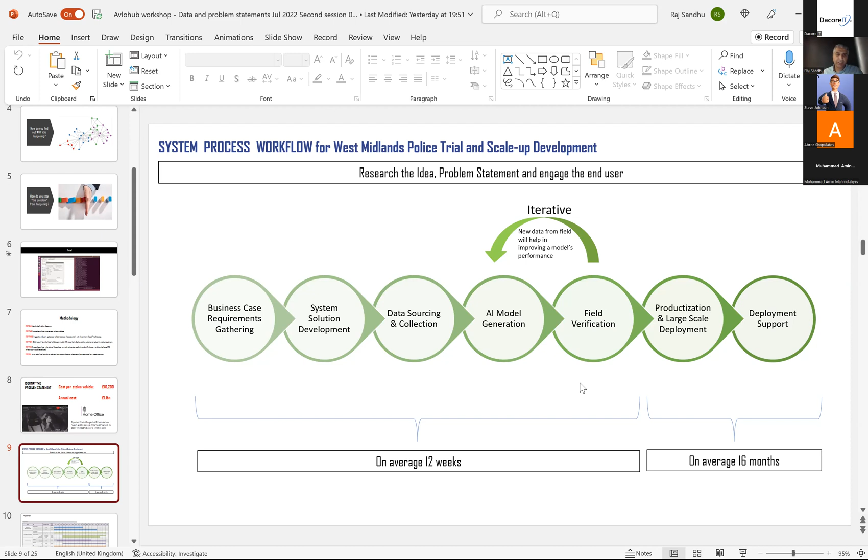And then we also touched on a bit about the planning - how do you actually put this together? And then you've got the separate job titles here in terms of the sort of tasks that take place. Okay, any questions from last time or any thoughts?

Again, interrupt me anytime. You don't necessarily have to listen to me. You can interrupt anytime. Any questions or thoughts on this?

Okay, so the important aspect which I touched on briefly was the domain expert. For each of the projects that we have, we always use a domain expert.

That is somebody who's got experience at a high level within a company. They may have 30-something years, 20 years minimum is best. They understand AI and data science, meaning they understand what it can do, though it doesn't mean they can program. They can also understand an academic paper, not fully, but they get what the academic is trying to do. And they could be a project manager.

They must provide input into the features, and when it comes to the commercial side, it's always easier for them to sell to the company.

So for our police project, this is our domain expert. As you can see here, he's been a chief superintendent. He's managed 300 staff, he ran Hertfordshire as a police force, and he looked after the murder team. So you can understand he understands policing very well.

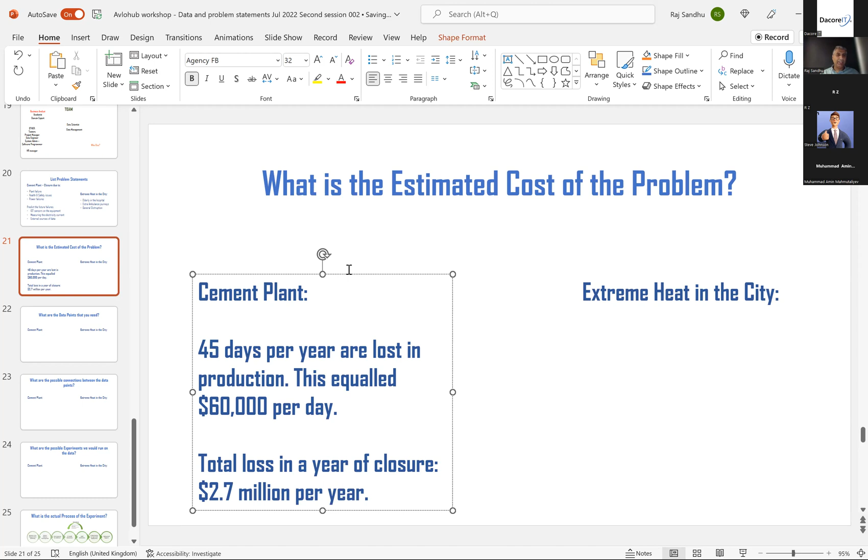So based on this, would you say that this is a problem statement worth looking into? Yeah, this is to everyone — it is worth it, right? Yeah, for sure, because the company is losing much more money.

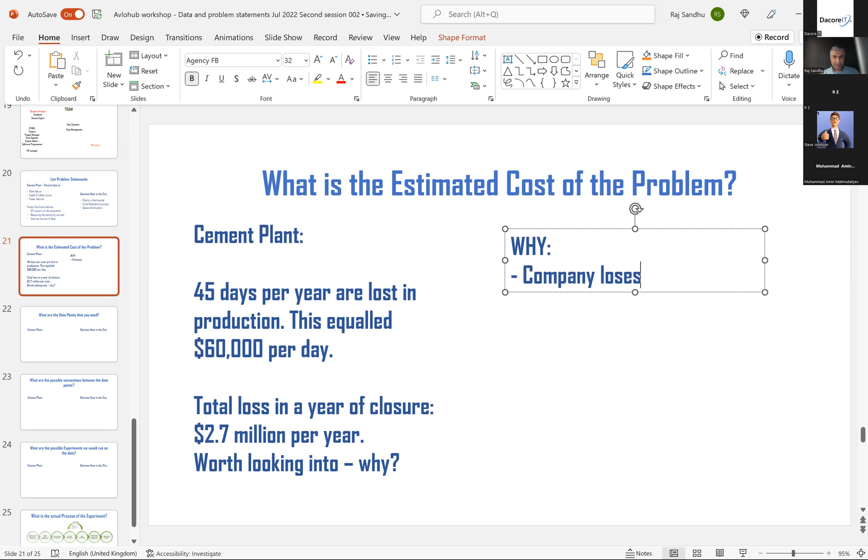So the company is losing 2.7 million, right? But think about it from your own perspective — just imagine you're going to the boss of the company. Abroad as well, this 2.7 million represents 20% of the annual income.

Right, do you think this is the only company that has this type of problem? Certainly not. Is this the only company that has this type of problem? Alex, Maruf, anyone? No, there would be a lot, right?

So many other companies will have the same issue, or similar issues, right? So in theory, if you've got 5 companies with the same problem, it becomes a $10 million plus challenge, right?

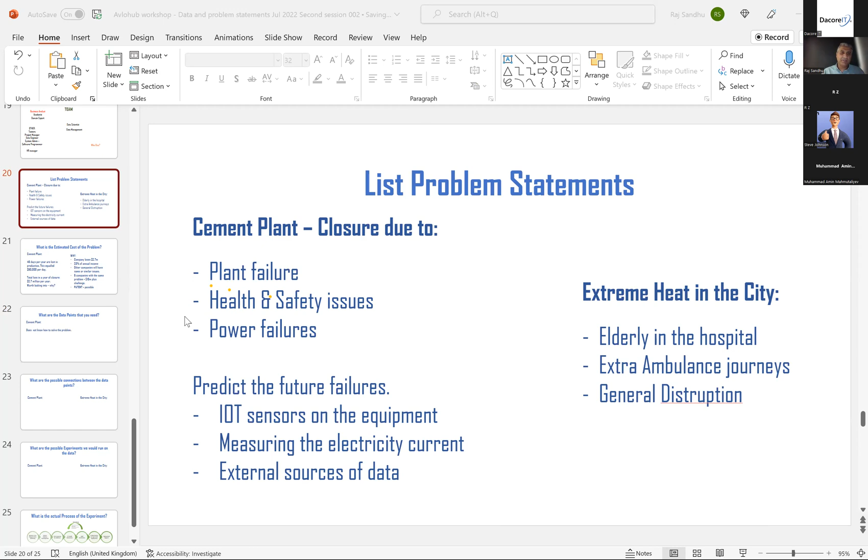Based on what we said earlier before. Well, yes, Dilshad — statistical data of what? What is statistical data? What do you mean? Tell me. Selling cement. Okay, cement sales, volume of production.

Right, what else? Extra cements. Okay, what else?

You know, Dilshad, you have to explain why we need this data. I think company expenses, company expenses. Yeah. Okay, what else? What else?

Right, so your materials, they call it, to produce, manufacture cement. All right, what else?

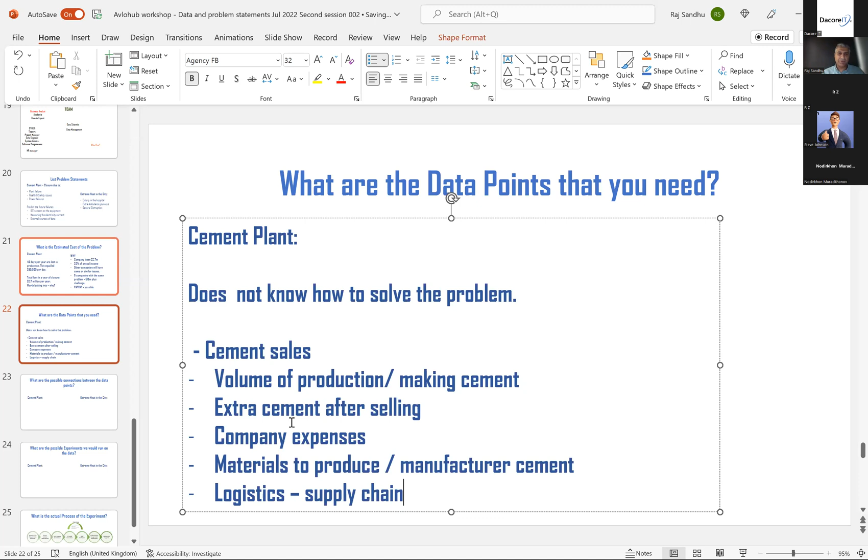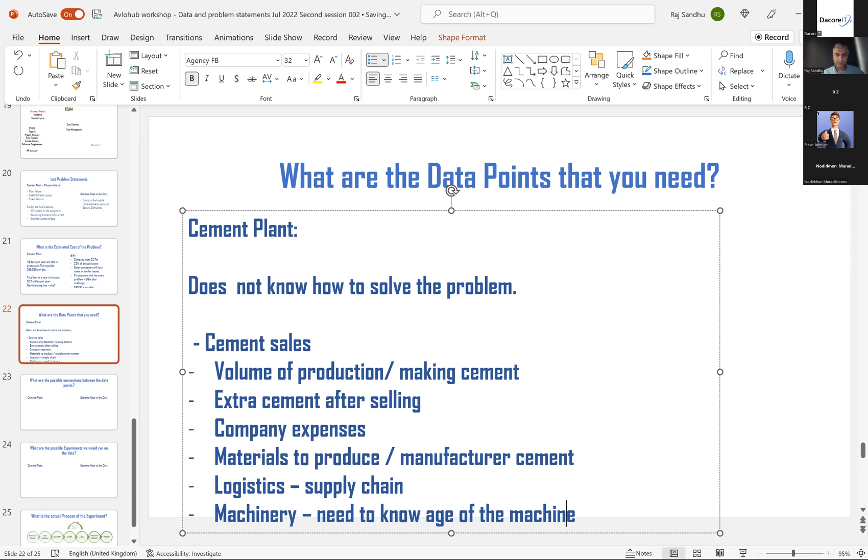Need to know age of machine, when it is serviced. Need to know age of the machine, when it is serviced. Cost of servicing.

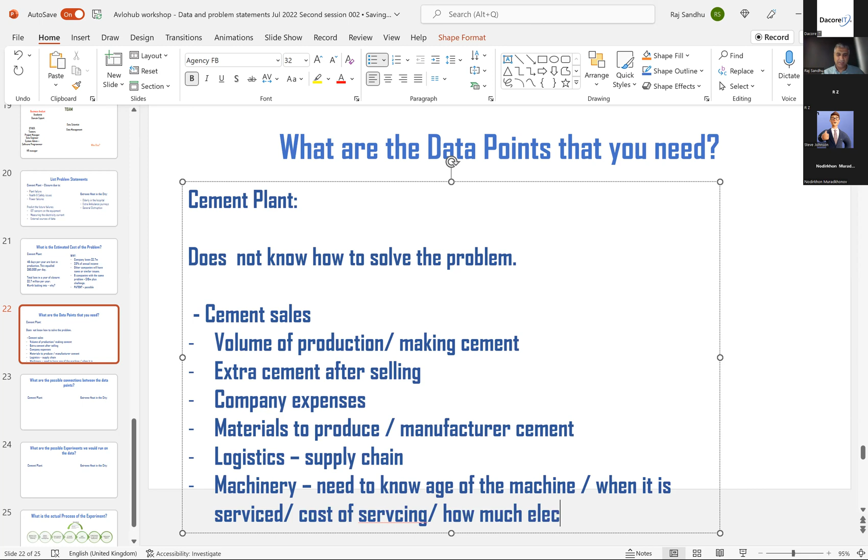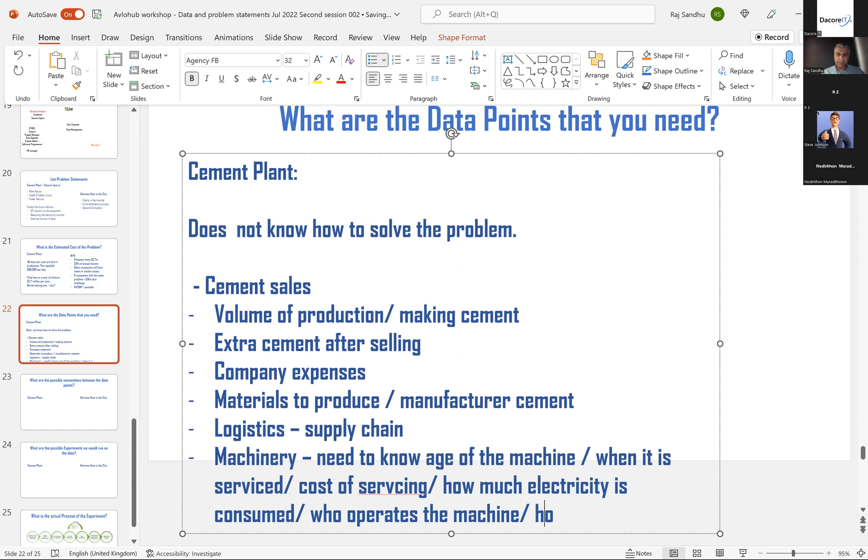Right? How much electricity is consumed? Right? Who operates the machine? Right? How long the machine is running?

The whole point of it, because of the request. So what? You mean the order? Are you talking about the order? Yes, if a company needs to make 1 million tons of cement, yeah.

But then how does that data help with the detection of when the machine will fail, that they will have a closure? You're not thinking, you have to think of the relevant data set that you need that will tell you why the machine is failing, why the production machine is failing. How will the orders give you that information? What are you looking for in that data?

Or why do you think? Again, there's no right or wrong answer, right? So the whole idea of the session today is to try and listen, try to understand what we're doing.

From what I can see, this is, I mean obviously I know a bit more, so that's why I'm saying it. But the machinery side is your starting point. If you have these data points, then you know everything about the machine, and you know about the staff, how much electricity is being consumed. So if it starts consuming more electricity, it means that there'll be more problems in the machinery. You understand? So that's what we need to try and do.

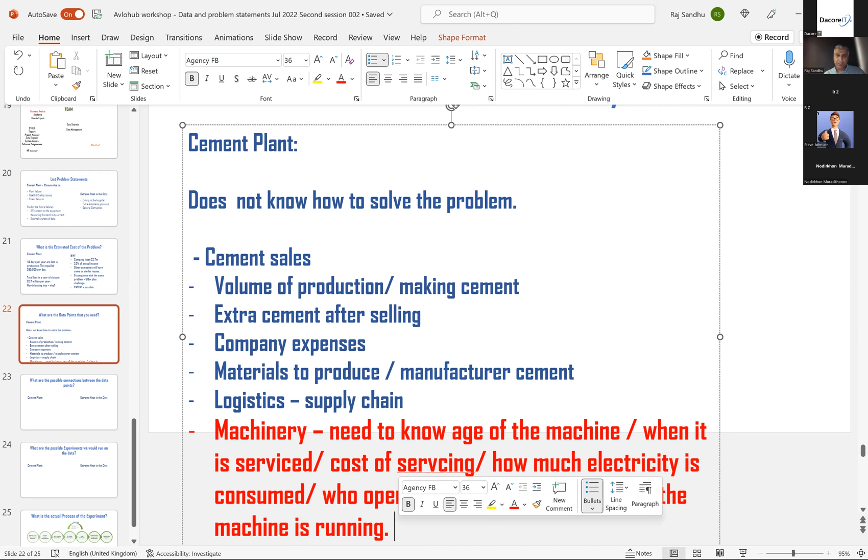The other new data we can get is to put IoT sensors on the machine itself. This will measure the vibration.

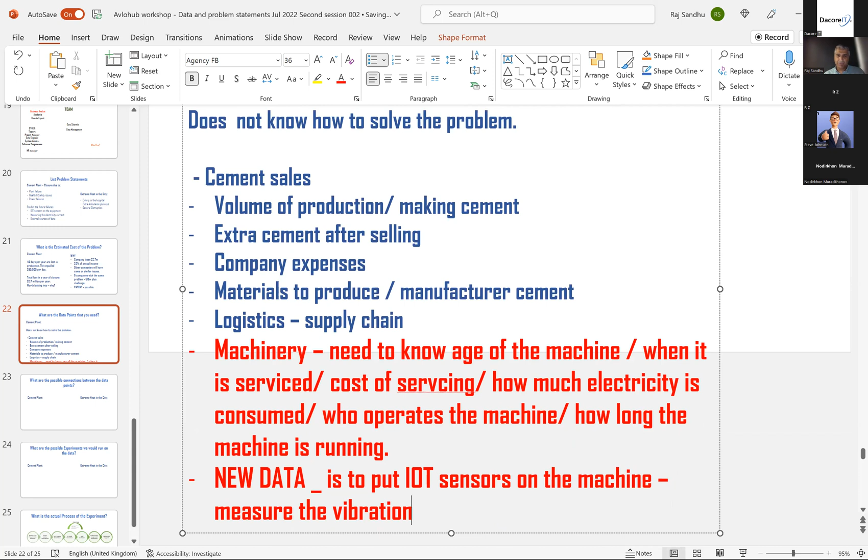Don't forget, this exercise is not to get you an expert into cement machinery, but just to make you think openly. Based on the knowledge that you have in technology, what can we use in a cement manufacturer to reduce how many days it is closed? Just try and think on that basis, because the cement company, they don't always know, do they? Because like I say again, if they knew, they would have solved this problem themselves.

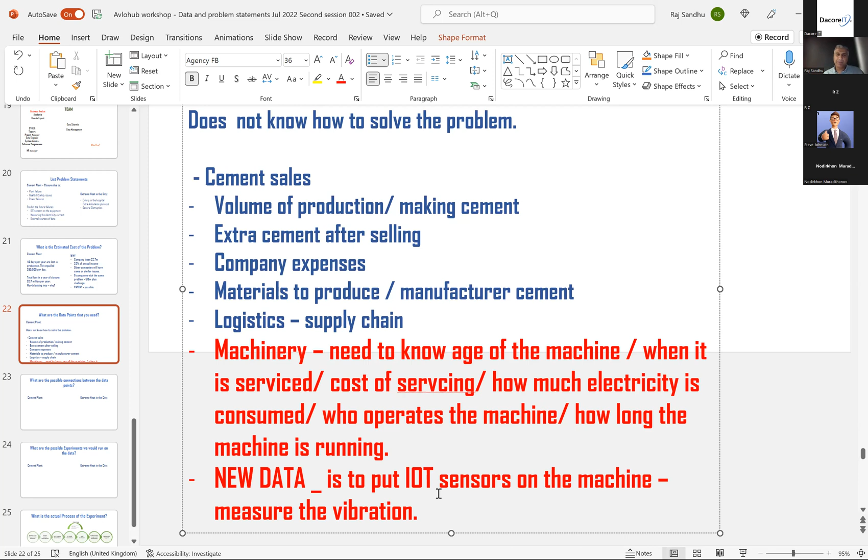All right, so based on what I've written here, is there anything else you can think of that we need? Raj, what about the heat level? What level? Heat. Oh, you mean the environment? Yeah, about the machinery, in summer it becomes more hotter.

Right, so that's true. No, it's not about the electricity. It's about the running of the machine. So in the summer, yeah, it could be that there's not enough cooling or something. And so yeah, exactly.

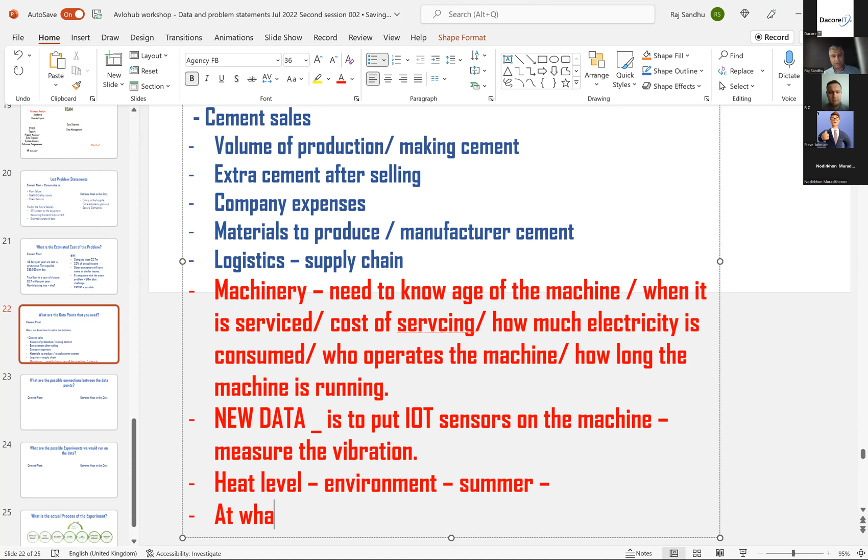Okay, that makes sense, right, everyone? Doston, Dilshad, Abdul, Maruf, Alex.

Yeah, okay good. So you see now, when it comes to any problem statement, you're not going to know exactly what to ask for. The domain expert would give you this information in most cases, but you have to give some information. So if you were going into a meeting about cement manufacturing, you may have to do half a day's research to look into that. All right, that's going to be part of the exercise that would take place.

Okay, so now that we've got our data sets, right, can anyone see it? So as I think Nodirkhon sort of touched on it, are there any possible, from the human eye, any possible connections between the data points? This is quite good in terms of, normally the domain expert would do this, right, to help you in your initial trial.

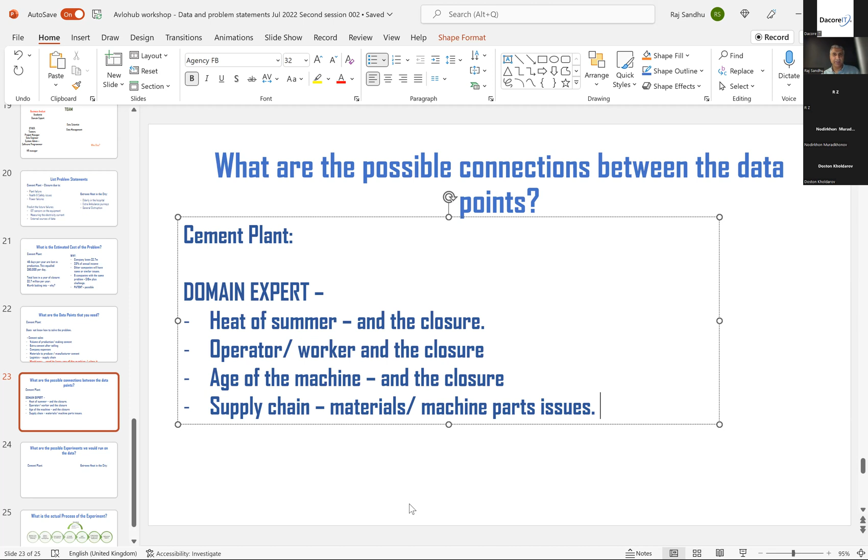But as I was making the point to everyone, does everybody understand where the academic paper — where a university has done the research on a topic — could be valuable in this exercise? Abro, Dilshad, Alex, Maruf — yeah, you understand? Good, good, okay, all right.

So, what are the possible experiments you would run in this particular situation? Now that you've got your data sets, you've got your questions — and this is a bit more technical — do you have any ideas what sort of experiments to run? I have no answers to this, right, so I'm thinking the same thing as you guys. What is it that you would run as an experiment?

Okay. How is that relevant?

Doston, the main problem is that the plant is closing due to machinery failure. The cement plant is closing due to machinery failure. You understand, Doston?

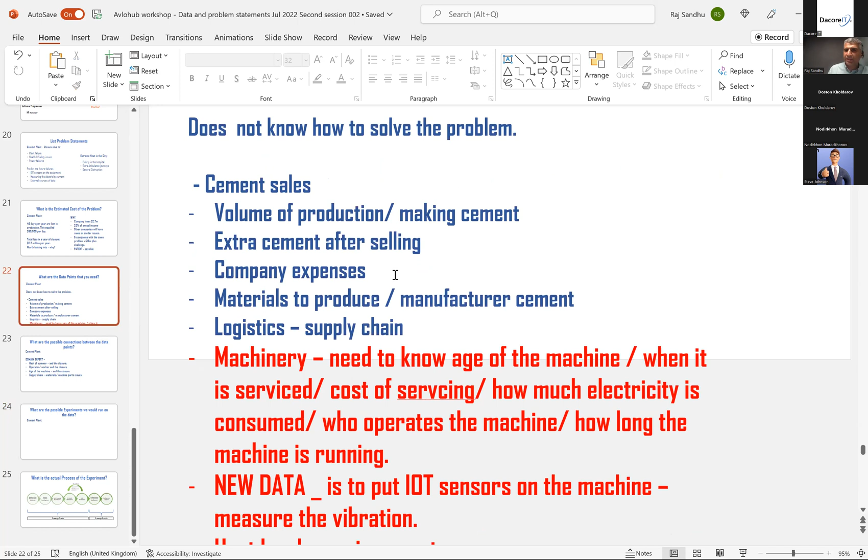You are asking what is reinforcement learning? What is the what, sorry? You gave a question, yeah. So we've got data sets, right? We've got the problem statements. Let's say we've got all of this data that you see here - all this data is available. So the company gives you the data and now says, okay, build me something where I can detect before the machinery will fail, before my plant has to close. So I'm saying to you, what experiments at the beginning do you run?

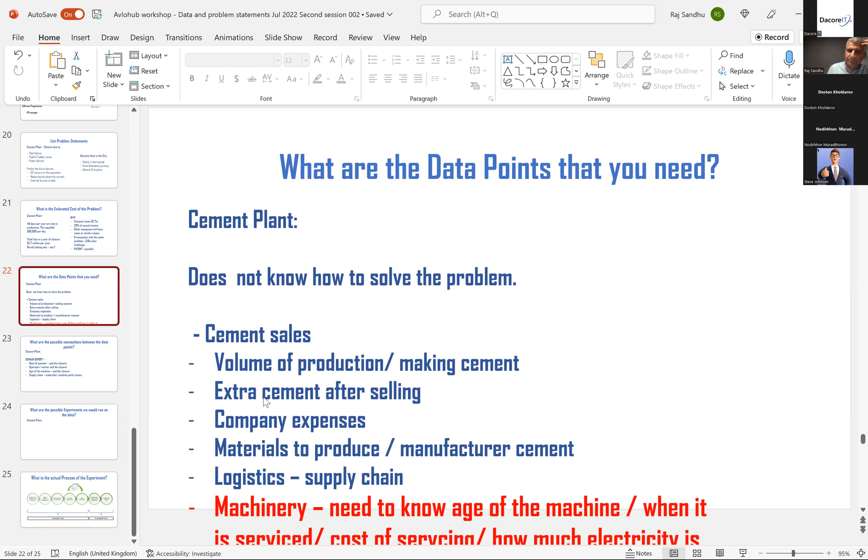I'll run the whole cycle. You may speak.

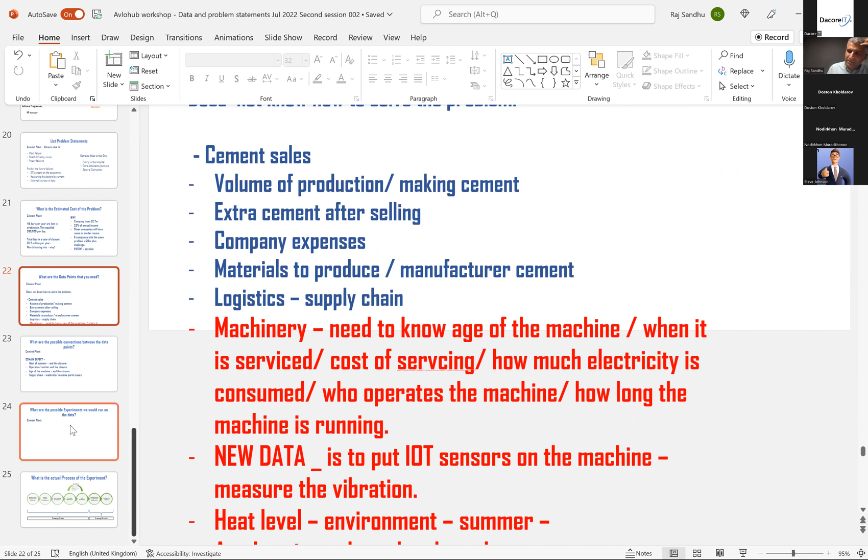This sounds like a classification problem, maybe. We might have some data, and according to that, we might build a simple logistic regression at first, and check if it works perfectly or not, and later hire someone to gather more data by watching out the machines and learning the causes for their failure, etc.

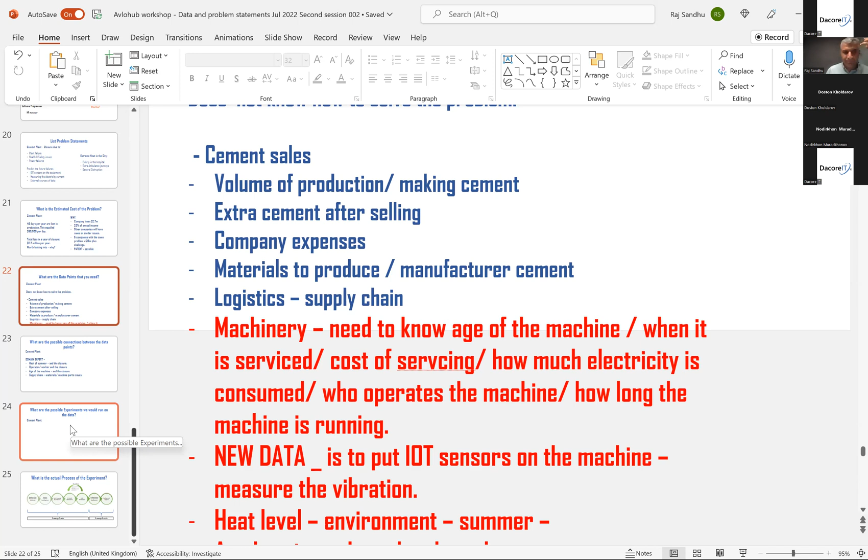Okay, so hold on. So basically, look, classification, right? Yes. So the classification is, what does a failure look like, right? Yes. And then what you can do... sorry, go on. This is binary classification. Yeah, and logistic regression works perfect for binary classification.

Okay, but you might also try neural networks, maybe fully connected neural networks. Or maybe take some of the images of the machines that broke or that are available for working, then use convolutional neural networks. This can also help in some cases, but in many cases, people prefer using neural networks because they are just working perfectly lately.

Neural networks need a lot more data to be trained, but as you have more data, the accuracy of your model will be higher. It depends on your data.

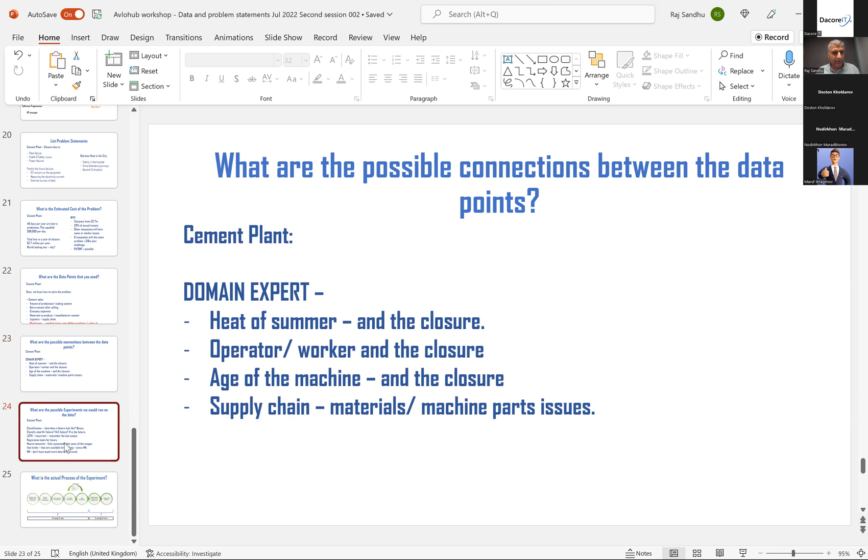Does that make sense to everyone? Yes, makes sense. But where are the AI developers? Yeah, this is AI. Oh, this is all AI. Okay, so the AI developers is too much of a generic term. We can't really say AI developers. Maybe AI specialists, maybe. But this is the AI, this is the AI team more than anything. You don't have such a thing as an AI engineer. Then we need to write it out like an AI team, to make it more clear.

But yeah, I mean the other guys they know that. So okay, so you see my point. So you see that, guys. Everybody else, you see where this is going.

Within the data sets that you have, you would probably break down 2 or 3 of them from the beginning, get your outcome, mark that as n, and then look backwards, mark everything as n-1, n-2. See if you can code that into an LSTM type functionality.

You run that as an algorithm on the historic data, and let's assume there's hundreds and thousands of lines of data. You find those patterns, and then you keep classifying, and you can even break it down even more, right?

But don't forget, in an experiment, you may have limited time. So it's very easy to start thinking, okay, I'm going to get this down to n-100. You may not have time for that, right?

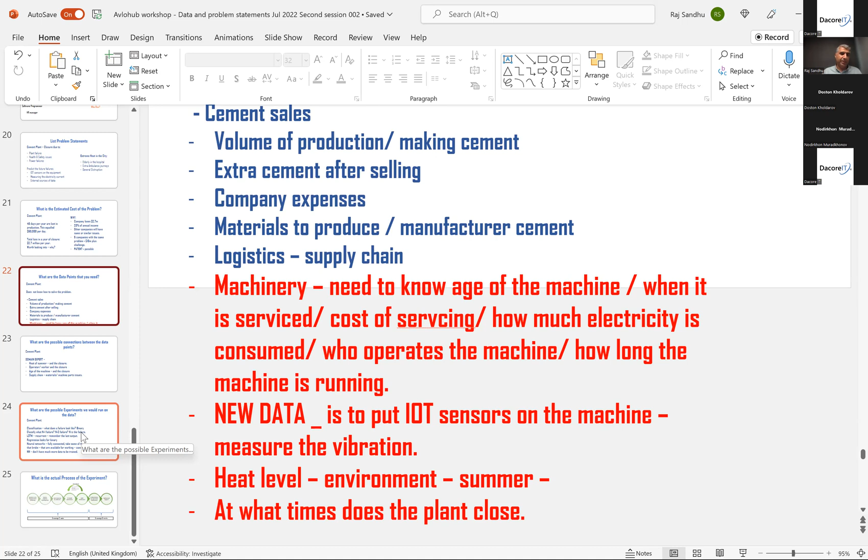Okay, that's an experiment. Can you repeat the question? So N is your event, the day of your event. Let me explain it again. He's asking, so N is the day of failure, right? All right, so N.

This is in temporal analytics. N is always your day of the event. So on day N, you've got data for production, which is 0. You've got data for electricity use, which is 0. You've got the temperature outside.

You've got the number of workers. You'll have the number of cement sold. You'll have the machine age data. You'll have the machine condition in terms of any recent maintenance. You'll have lots and lots of data for N. So you classify all of your data sets, and you tell the computer that this day is N.

So what do you do as your N-1? Nodirkhon said for the temperature, N-1 should be the temperature 1 week ago. Okay, which is according to time series problems. Exactly, 5 days is the best choice, I think.

Well, no. Again, this is why this is an experiment. In my view, I would say N-1 would be a day before. So I have to do that, yes, that's my thinking, right? So this is the creative part. There's no right answer and there's no wrong answer.